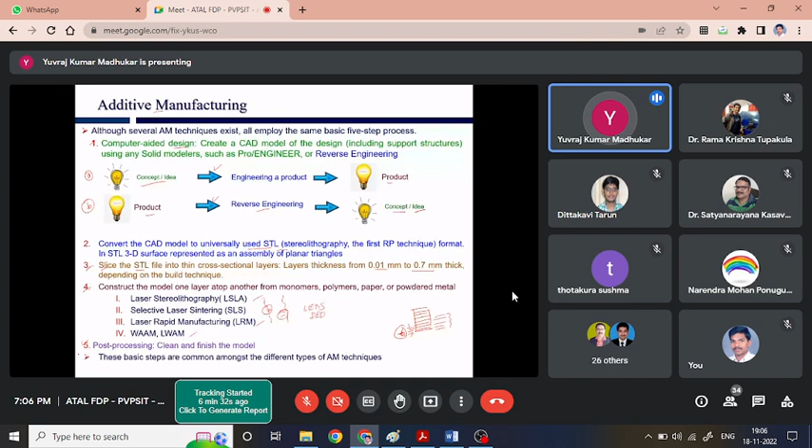In case of additive manufacturing, we cannot get the finishing of the product as what we get in a machining process. So if we want that level of finishing, yes, we have to go for post-processing. There is no alternative.

Now, stereolithography or the STL file format represents any CAD model as a triangular tessellation. While converting it, we have to make sure we are representing the actual CAD model, and the number of triangles or tessellations we use should not be very much high or very much low.

If it is too high, we are unnecessarily increasing the computational time and complexity. If we make it too low, it may not be able to approximate the exact size of the part or product we want to make.

For example, when we wanted to make this kind of nozzle, we went for a coarse structure as well as a fine structure. When we manufactured the product using both STL files with the FDM, fused deposition modeling process, in terms of accuracy we found there was no difference at all.

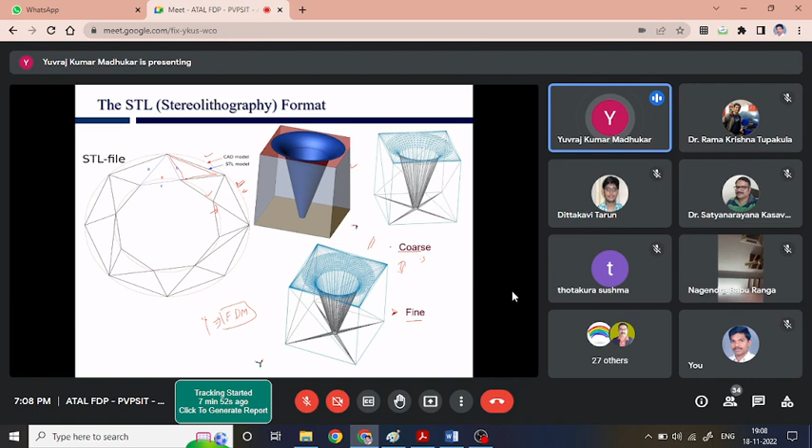So while converting the CAD model into the STL file format, we have to ensure we are choosing the number of tessellations or triangles as appropriate as possible, which can give a better representation of the part to be manufactured, and we also have to consider which process we are dealing with.

Now, supports are also an essential part of the additive manufacturing process. Whenever we get any overhang features that need to be deposited, since it is a layer by layer manufacturing process, certain supports have to be provided, and there are different mechanisms for this.

We have to design these supports while making the CAD model itself. Now, when we are going for slicing, the one thing we need to take into consideration is that slicing is nothing but dividing the CAD model into a number of layers.

When defining our layer thickness, the higher the thickness, the lesser the build time. However, it leads to the formation of cusps at the edges. We wanted to make a very much oval shape like this, but we end up with cusps here, so it doesn't represent the actual shape of the part.

If we reduce the layer thickness, yes, we increase the dimensional accuracy of the product. However, it takes longer time to deposit because the number of layers has increased. So somewhere in between, we have to find an approximation where the layer thickness best represents the part accuracy.

At the same time, the cusp size error should be as minimum as possible. Apart from that, while slicing, we should choose the part orientation so that, as much as possible, these errors can be avoided. For example, if we want to make a rhombus kind of shape, instead of depositing it in this direction, we can turn it to 45 degrees and deposit a simple rectangle or square kind of box layer by layer.

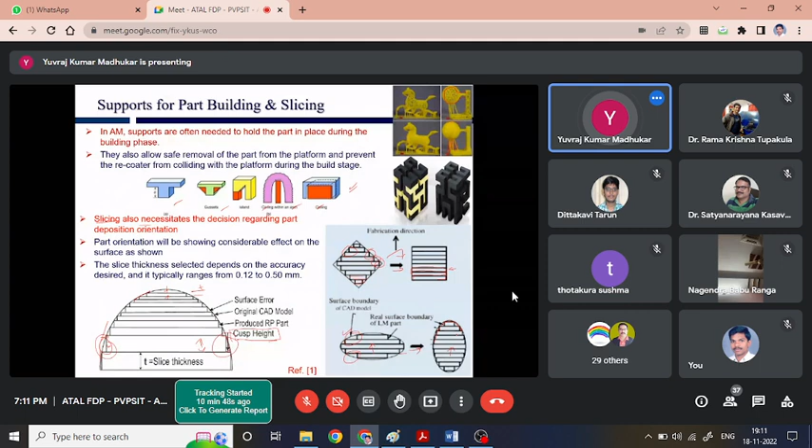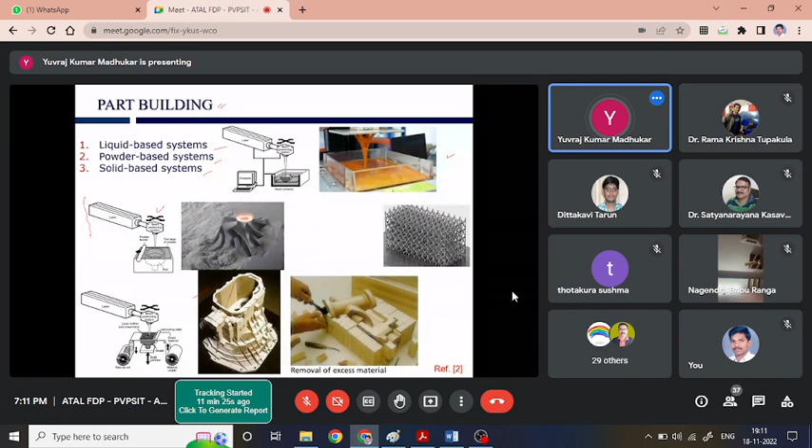Now about part building, there are different methods for making the part. It could be a liquid-based system like stereolithography, which is specifically for polymer-based additive manufacturing. For metal additive manufacturing, we have powder bed fusion processes like selective laser sintering and selective laser melting, and there are also processes where papers or thin sheet metals can be processed, like laminated object manufacturing, and many other additive manufacturing methods. I think all of these must have already been covered in detail, so I'm skipping this part.

Now moving to today's topic, we will discuss additive manufacturing in complete detail, specifically its monitoring and control for Industry 4.0 application. When we talk about WAAM, it is a wire arc based additive manufacturing process. Now, in order to go for applications like Industry 4.0 and smart manufacturing, all these manufacturing processes basically involve computer integration as well as some sensors and actuators, so that the stage or state the manufacturing process has already reached is known to the operator or the person monitoring it.

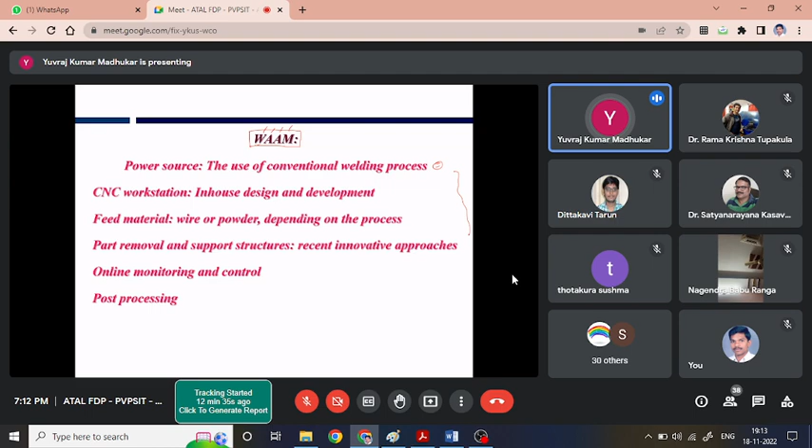So in order to ensure all this, we need to know the construction of the entire wire arc additive manufacturing process. For example, the first one is the power source. What kind of power source can we use for the additive manufacturing process? That power source has to be computer integrated, only then monitoring and control is possible. So while choosing the power source, we have to ensure it comes with that facility from the manufacturer itself, or we have to make our own electronic system so that we can communicate with the power source.

So we can use any conventional welding system for the WAAM application; there is no difficulty in that. However, when we talk about additive manufacturing as a computer integrated manufacturing system, not every welding process or arc welding power source can be used. We have to use certain power sources only, which can be made compatible with the computer, or somehow we can communicate with the machine. That information we have to ensure while buying the power source. However, a conventional welding machine can be used for the WAAM application, no problem at all.

Now, since we're talking about additive manufacturing as a computer integrated manufacturing process, yes, of course we require the CNC workstation. Now, if we go to the market to buy the CNC workstation, the cost is of course going to be very high.

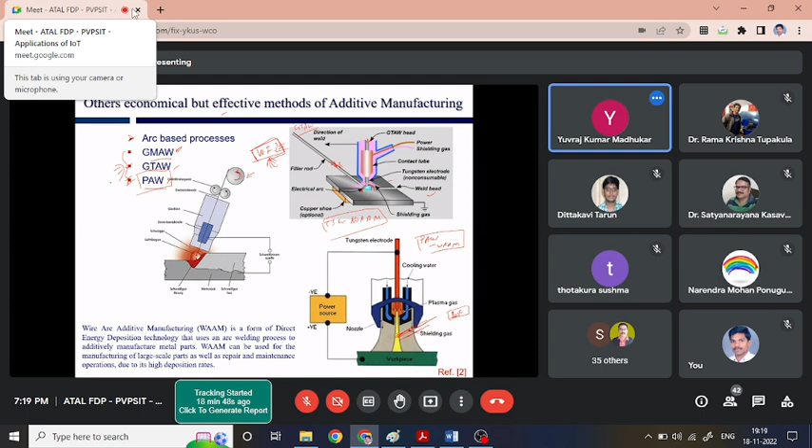However, depending on the application of the product, we can selectively machine it and reduce the overall manufacturing cost.

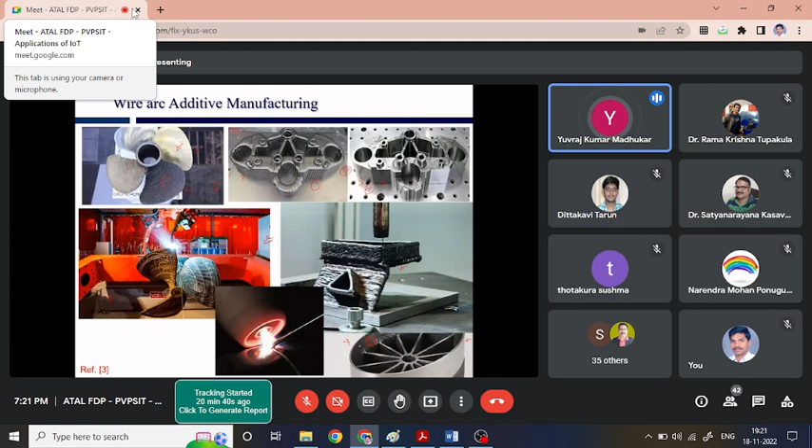So whenever we are going for post-processing, specifically machining, sometimes we have to be very selective depending on our application. We should choose which part or side of the component has to be machined, so that unnecessary machining can be avoided.

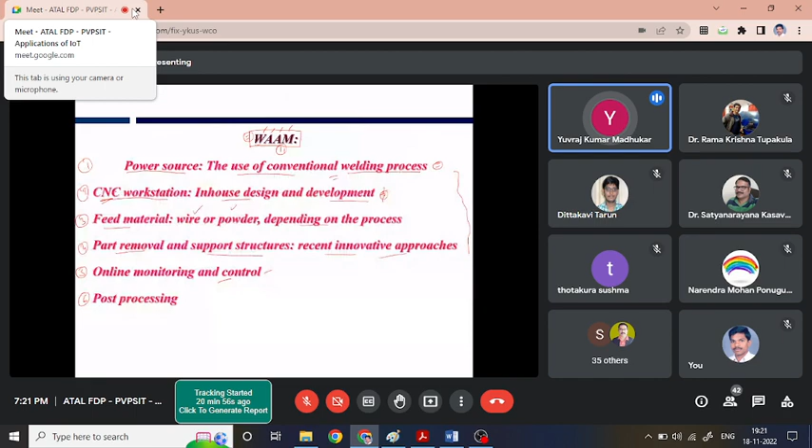Moving further, let us build our own WAAM system. Can we make our own CNC workstation? Making a CNC workstation is not a very complex job, it's quite simple. Here, basically what we do is we have a lead screw, which is nothing but a screw with spiral threads on it, and two support shafts which are simple straight shafts.

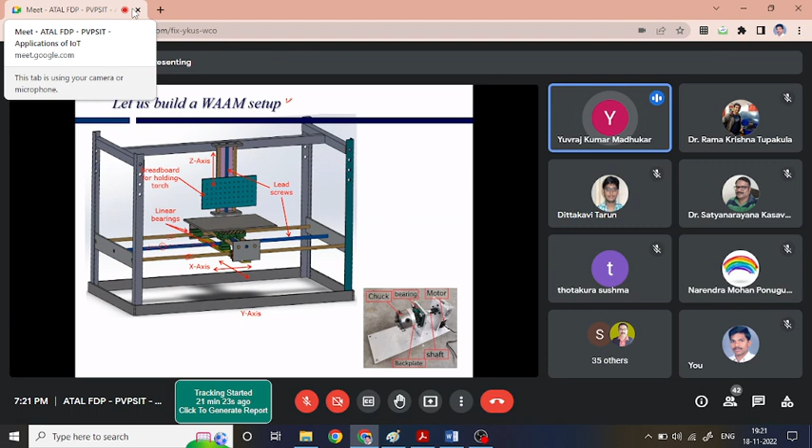There's no thread, nothing on these support shafts. It is mounted on a plate with the help of a linear bearing. Now, a linear bearing is basically a bearing. When we say bearing, it's nothing but one shaft stationary and another shaft rotating. A linear bearing is the same thing, however it moves in a linear direction.

So it's nothing but a structure like this, on which a number of metal balls are there, which can move to give the reciprocating motion. So what we can see over here is the linear bearing, supported on the same shaft. Now this lead screw is at the center over here.

We have got the ball nut. The purpose of the ball nut is similar to any nut. It basically can move if we have a thread. If you rotate the nut, it can move from one place to another in a linear direction. Or if we rotate the shaft, the nut will automatically move in a linear direction.

So here we have the ball nut at the center, and at one end we can connect it with some sort of power transmission device. We can go for a stepper motor, the best option. When the stepper motor rotates this shaft, it moves this ball nut, converting the rotational motion of the shaft into linear motion. Depending on the motion of this motor, either clockwise or anti-clockwise, we get the reciprocating motion of this entire stage.

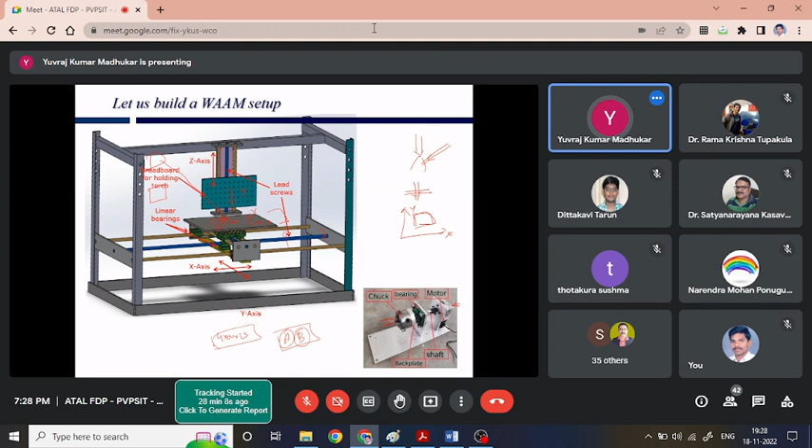We can make it either a 4-axis workstation also. So this is the system we have built ourselves. The cost of our entire system came close to 1 lakh rupees only. Here we have the stepper motor, and here is the shaft.

Here is the lead screw, two lead screws for providing the support, and the space of this workstation, what we have developed in our laboratory. It can use in x-axis for nearly 1 meter, and the y-axis it gives 0.5 meter, and in the z-axis it can use up to close to 0.4 meter of workspace. It would be able to provide no problem at all.

Here we have seen the GMAW torch hanged on this breadboard, and here we could see one terminal of the power source of the MIG power source connected to the workstation.

And here we have got our stepper motor. Now if we see the control system, since we are dealing with the additive manufacturing process, which is the computer integrated additive process, we need to communicate to the machine, we need to communicate to all these motors, and it should respond with respect to the command we are going to write. So ultimately we need a PC interface, personal computer interface. For that, typically we require the CNC control boards or the PLC.

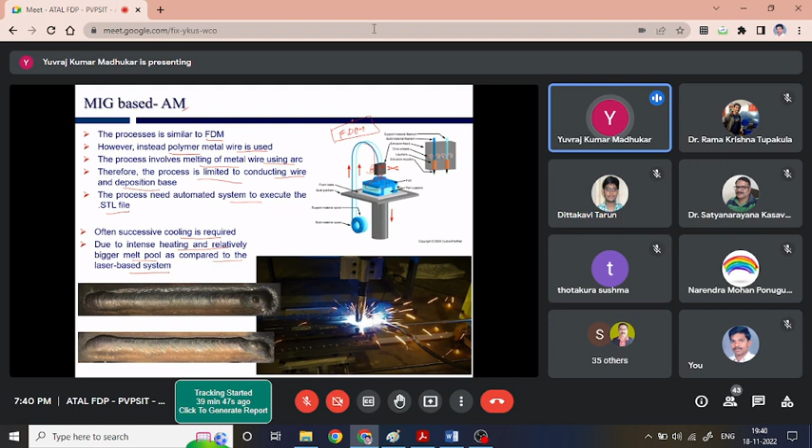One of them includes connecting a relay to our PLC control system and triggering it as soon as the stepper motors start moving, or the G code starts. We need to ensure that movement of the CNC workstation and the ignition of the arc take place at the same point of time.

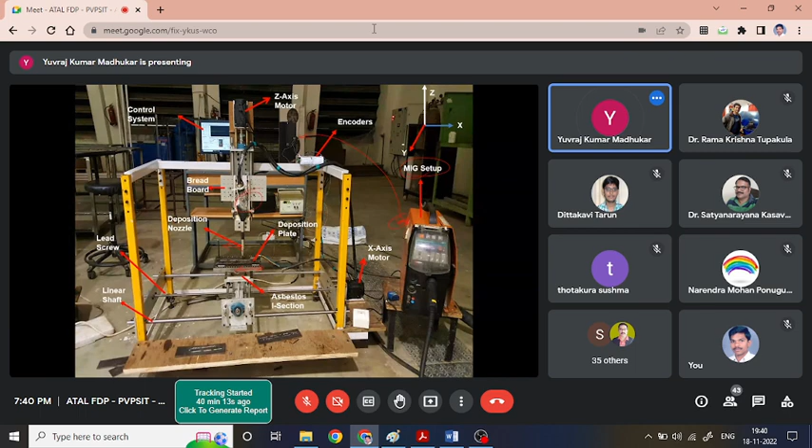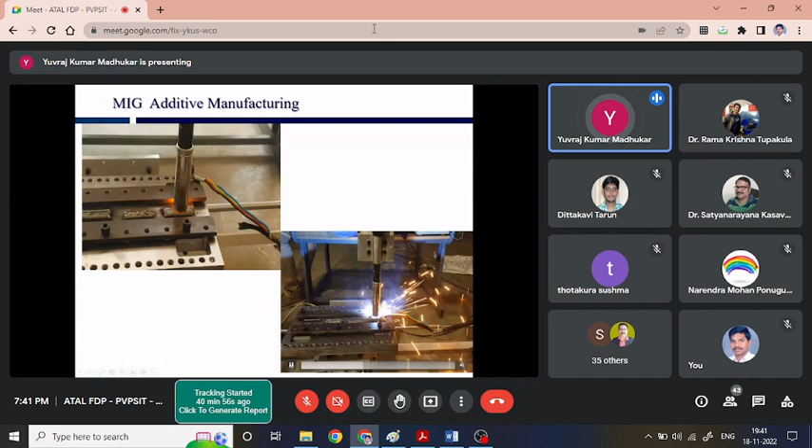In this particular first video we could see that sometimes the arc is getting off during the process itself. Here the arc does not remain consistent - it keeps turning off during the process, compared to the other process which is becoming almost continuous.

All of this affects the part quality we are depositing. At the beginning, we are going to end up with a structure depositing like this - a lot of undercuts on the deposition. Even after machining, there are some blowholes. It does not give very good dimensional accuracy. At the beginning, we will come across this kind of situation only.

However, we have to understand the basics of wire arc based additive manufacturing process. If we talk specifically about the MIG-based additive manufacturing process, MIG is nothing but a constant voltage process, and the current will be determined based on the resistance between the electrode and the workpiece.

Look at one case when the wire feed speed is, let us suppose, 3 meters per minute, and the commanded voltage is, let us suppose, 17 volts. We get a deposited bead something like this - more here, lesser here, more again, lesser again - meaning we are not getting a consistent, good deposited bead.

So what we did was record the welding parameters in situ - welding voltage and current. Since MIG is a constant voltage process, once the arc has been stabilized, the voltage becomes almost stationary, close to what's been commanded, but it goes relatively higher, to 19.2 volts.

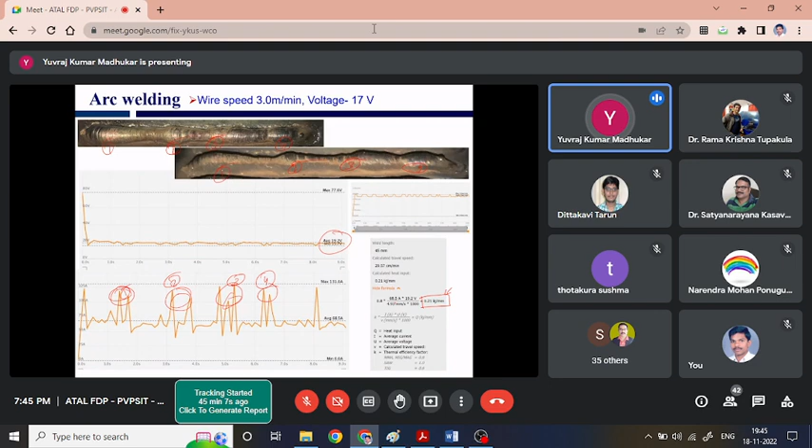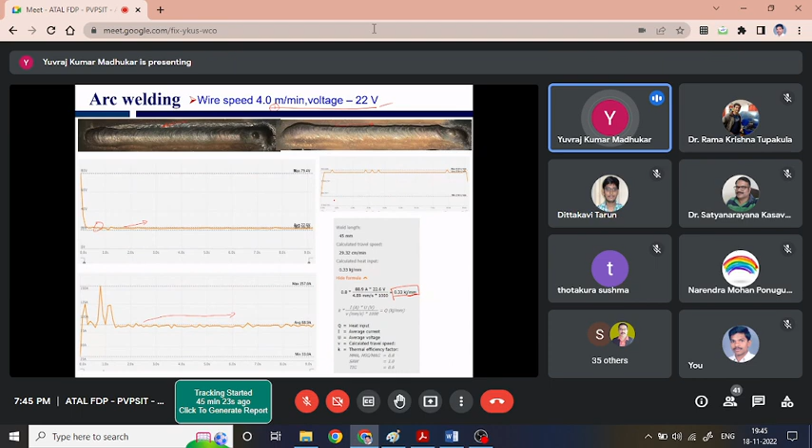Now, if we calculate the amount of energy input, in this case we've been giving nearly 0.33 kilojoule per mm, and in the previous case it was nearly close to 0.21 kilojoule per mm. So certainly, without changing the material property, we are giving much less energy. There is a high chance of short circuiting, and because of that the current increases wherever the short circuiting happens, causing non-uniformity in deposition. Probably in all these cases this kind of situation has been happening. So the bottom line is we need to optimize the parameters for the additive manufacturing application.

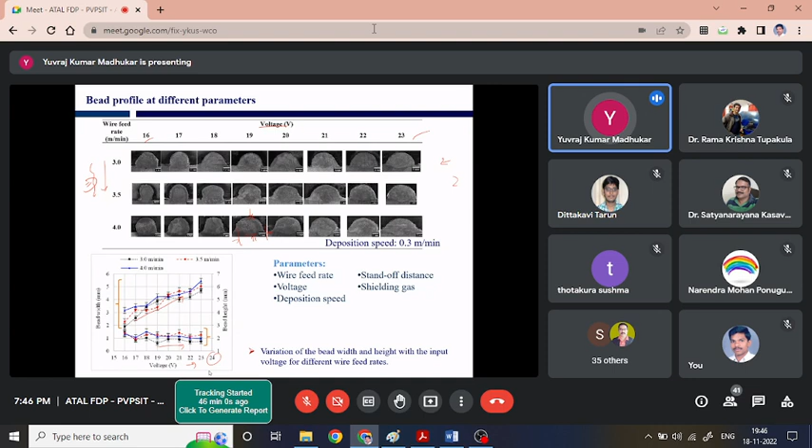Here we could see, for different voltages starting from 16 volt to 23 volt and different wire feed rates, different bead properties can be found. The bead width increases almost linearly with respect to the voltage, however the bead height remains almost constant. It is quite obvious, since we are increasing the voltage, we are increasing the input energy. So it is obvious, but we have to optimize it.

Once we could optimize the parameters, we could deposit such beautiful shapes, no problem at all. Even in case of WAAM application, we could deposit wall thickness of the order of just 2 mm. Some fulcrum shapes, resembling propeller shapes, we can deposit very easily.

Moving to another type of additive manufacturing process, TIG-based and plasma-based additive manufacturing process. Here, first the electric arc is stabilized between the electrode and the base plate. Further, the wire is fed into the arc through an additional wire feeder. The deposited layer, bead profile, and bead height depend on the arc, electrode diameter, point angle, stand-off distance, mode of operation, whether AC or DC, arc current - all these parameters play a certain role.

So here we have our TIG power source, and here we have the wire feeder. Now, if we go to the market, there are different kinds of wire feeders available. Some of them are typically called cold wire feeders. There are some hot wire feeders also available. So we can buy any wire feeder, no problem at all.

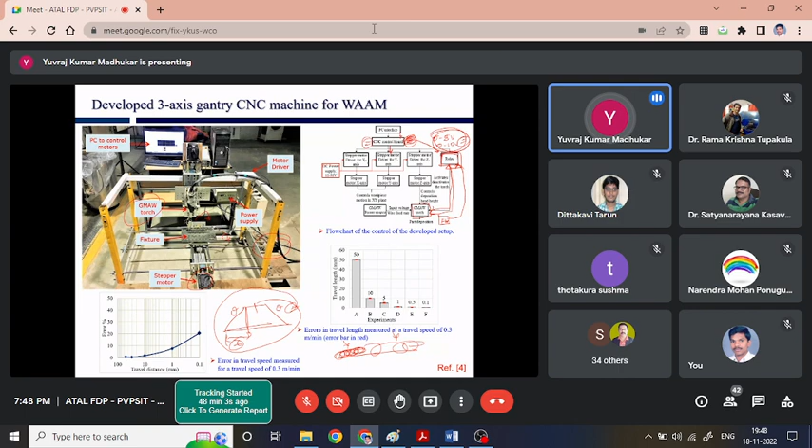However, one thing we have to ensure when buying the wire feeder is that it should be triggered or communicated to through some additional circuitry or relay, so that we can connect this wire feeder similar to how we connected the power source, like the GMAW power source. Similarly, the wire feeder can also be connected to the relay, and as soon as the arc is established and stable, the wire feeder should start feeding the wire. So we have to ensure that particular provision is always there in case of a wire feeder.

Now, if you go to the market, there are different types of wire feeders available. If it feeds the wire at room temperature, we typically call it a cold wire feeder. If there is provision for heating the wire, because preheating sometimes gives certain advantages on deposition, we call it a hot wire feeder. There are some wire feeders which can feed the wire in pulse mode, meaning feeding, then stopping, feeding, then stopping. So different options are available. Of course, with more functions, the cost of the wire feeder increases significantly.

However, one feature we have to ensure it has, whenever going for the TIG-based additive manufacturing process or the WAAM-TIG process, is that this wire feeder should have one more function apart from external triggering - a retracting feature, the push-pull mechanism.

What is the push-pull mechanism? If I zoom into this area, in case of a wire-based additive manufacturing process, we generate the stabilized arc into the base plate and we feed the wire into this stabilized arc.

Now at the edge, once the deposition is done, we have to make sure the wire is pulled back from this arc zone before the arc is turned off. Otherwise the wire is going to get stuck to the deposited bead itself. If that happens, every time we have to manually cut this wire.

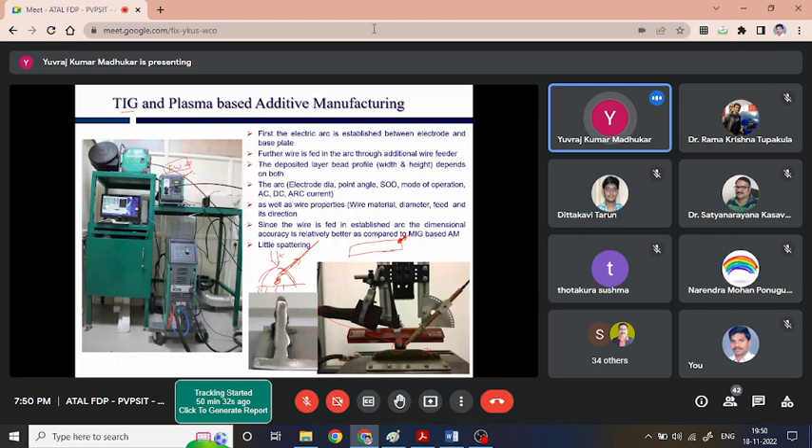Here we could see how gentle this process is compared to MIG. There is no spatter at all, and it's a very gentle process. In a normal VGA based camera, there is a lot of glowing, so we couldn't see how the deposition is going.

However, when we recorded it using the thermal camera, here we could see first the arc has been stabilized. Then we have to feed the wire into the stabilized arc tip, and a very nice bead we are getting just behind it. There is no spatter at all.

Now this is the first layer of the deposition, and this is the 10th layer of deposition. Here we have to notice, when depositing the first layer, the melt pool size is very much small, compared to when depositing the 10th layer, where the melt pool size is significantly larger.

To realize the size of this melt pool or melt puddle, this electrode diameter is 2.5 mm. Considering that, we could say the melt pool size is of the order of nearly 12 to 15 mm. In these two cases there was no change in deposition parameters, meaning with an increase in number of layers, the melt pool size increases significantly.

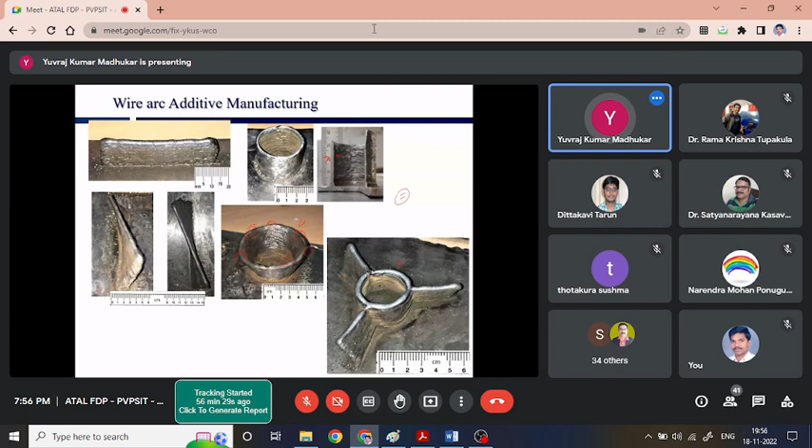However, at the same time, in case of arc-based additive manufacturing processes, whether MIG, TIG, or plasma, the dimensions we get on the deposition surface always form certain striations, and because of that the standoff distance between the electrode and the workpiece keeps fluctuating, compared to the first layer of deposition where we deposit on a flat bed. So in the WAAM process, once the bead is deposited, the surface has certain striations, and that striation creates a greater challenge for the stabilization of the arc.

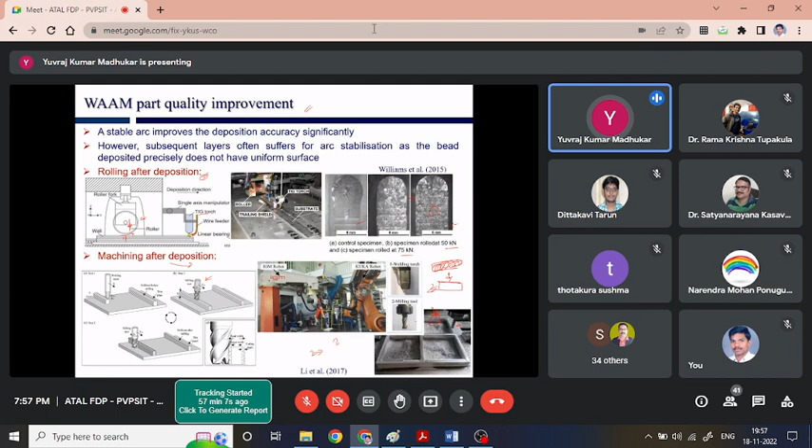So if we go for machining, the situation becomes such that every layer is deposited on a flat plate. For applications like monitoring control, this kind of surface gives much better results and much more control over controlling the entire process. It also helps with the machining of intricate shapes, because if the shape is very complex, sometimes after the complete deposition of the product, tool reachability becomes a matter of concern in WAAM.

Now we may need to come across some innovative ideas for WAAM in order to minimize the requirement of a support structure, because in case of WAAM, the support structure is the biggest enemy. We saw the melt pool size is relatively much bigger when we go further into the deposition.

So one idea we come across: for example, if you're dealing with a part like a propeller blade, if you go for bottom to top deposition, a good amount of support structure would be required, and in WAAM, making the support is a huge challenge. So we can modify or come up with innovative ideas to minimize this requirement of support structure. One such idea could be going for radial slicing.

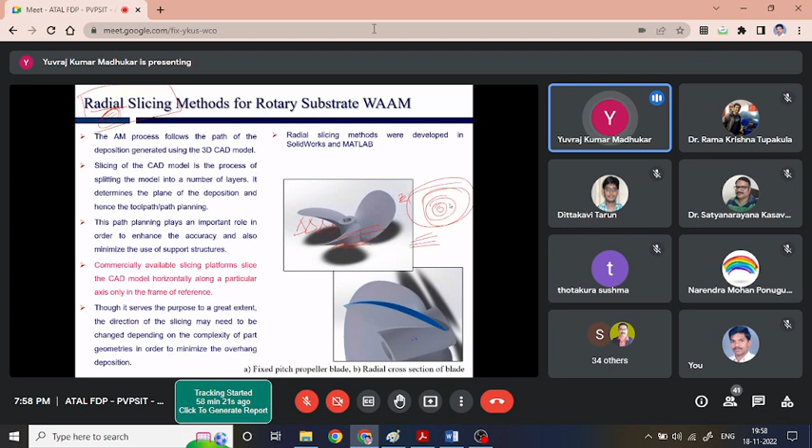So instead of slicing from bottom to top, we can slice the product radially. Of course, no commercially available slicer or software can do this. We have to write our own code using MATLAB. There is no alternative, or there are some manual methods also available. For example, we can do it in SolidWorks as well.

What we have to do is radially slice the part geometry, and with respect to different coordinate systems - the xy plane, xz plane - make a number of lines equal to the layer thickness, and try to find the coordinates of each point in both the xy and xz planes, and find the coordinate of any point in x, y, z coordinates. Collect that data into an Excel file or IGES file format, and then write your own code.

Yes, it can do the job, however it is very laborious. The better way is to write the code in MATLAB file format, on the MATLAB platform. We wrote our code there itself, and let us suppose this is the blade.

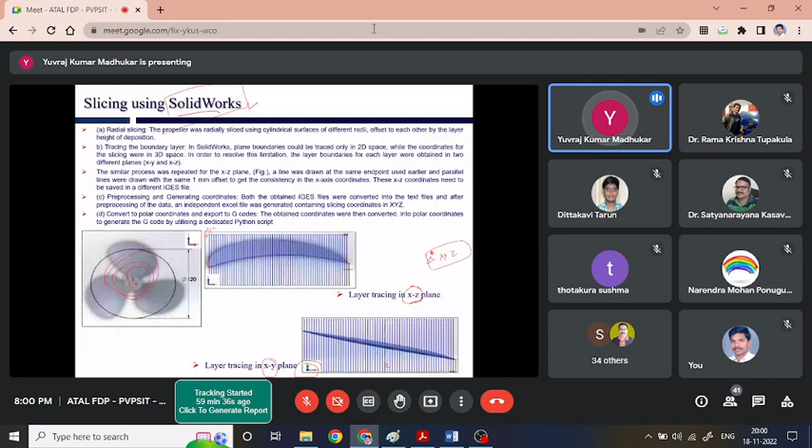A different radius of a circle can be used, equal to the layer thickness, to find out the coordinates of each individual point on this circle or layer, in both the xz plane and the xy plane. Once we know the coordinates, we can write code in MATLAB itself to generate the G code. That G code we can feed into our PLC workstation.

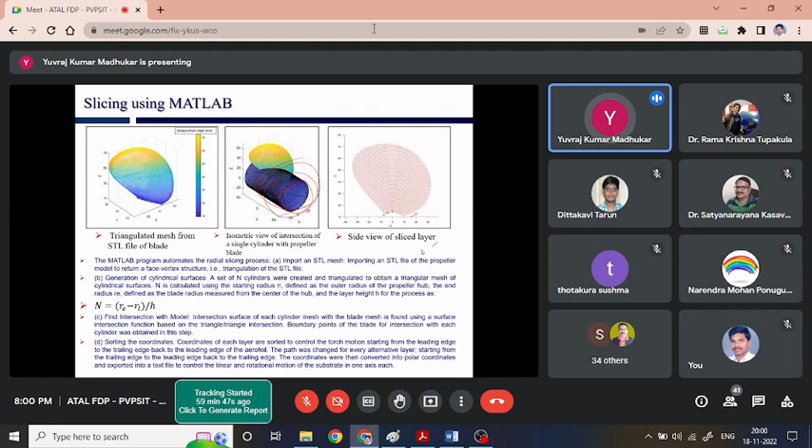By doing this, we could deposit, say, on a shaft acting as a base, a propeller blade without the use of a support structure. Since we are dealing with a shaft as the base plate, we are not depositing on a flat plate one layer upon another. We have to go for a workstation which can move the job horizontally about the rotation axis.

So for that, we can go for a fourth axis on the workstation. We can build it simply: here we require a chuck, and the chuck shaft is supported by some supporters, and the motion we can provide using a stepper motor, which again can be connected to our PLC workstation, and we can get the code using our MATLAB programs.

So the bottom line is we may need to come up with innovative ideas to minimize the use of support structures in the case of WAAM, otherwise, because making supports is very difficult in this case. However, there are a lot of innovative ideas coming into the literature.

If you look into the literature from nearly the 1990s to 2020s for additive manufacturing and 3D printing, the number of applications we see close to, in 2017, has gone close to nearly 6,500 publications per year. However, in case of support structures, we hardly get 500 publications throughout the year. So there is a lot of scope for research in the field of making support structures, specifically since making support structures for this process is very difficult.

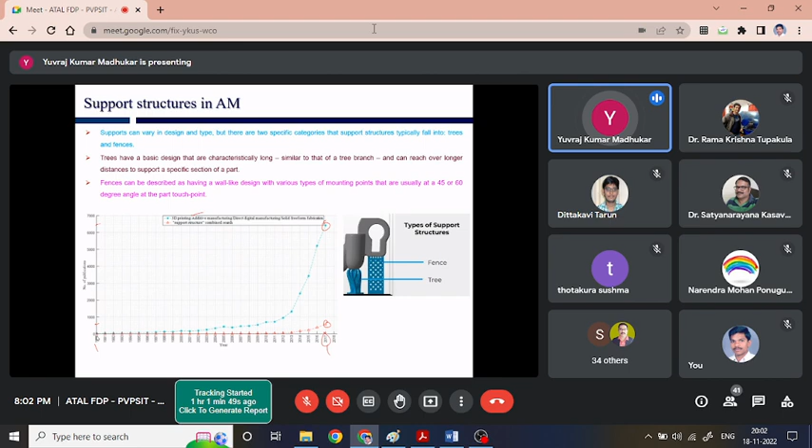So in order to overcome this problem, one such idea could be radial slicing. Another idea for making the support structure, if we see, is that the requirement of a support structure comes only to provide the base for the first layer, and the further layers would be deposited on it.

If we talk about processes like selective laser sintering, laser engineered net shaping, and direct metal laser sintering, support structures are often required depending on the part geometry. The typical structures are lattice support, honeycomb support, unit cell, etc.

Achieving this kind of support structure in the case of WAAM is relatively very difficult. So either we can go for a multi-axis workstation and innovative slicing methods like we did, or we have to come up with certain more innovative ideas.

So what we have done here: we took metallic pillars, or cuboids, of certain dimensions, and arranged them into an array of rows and columns. All these pillars have certain holes, one on this side and another on that side, and we mechanically fasten them using a nut and bolt. At the top surface, here we have a surface we can use for deposition.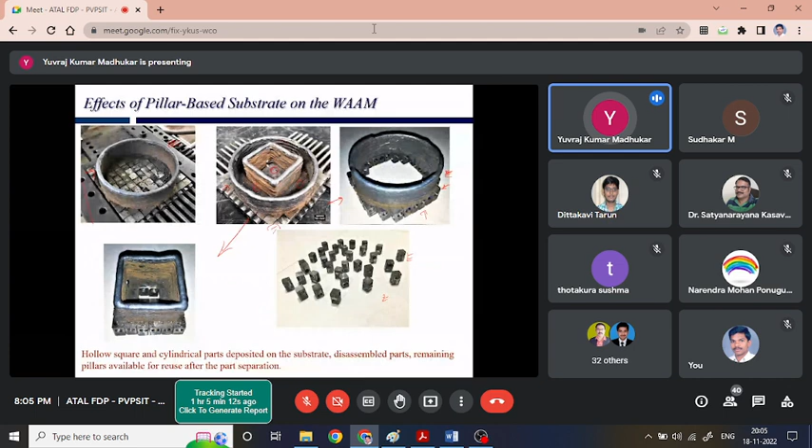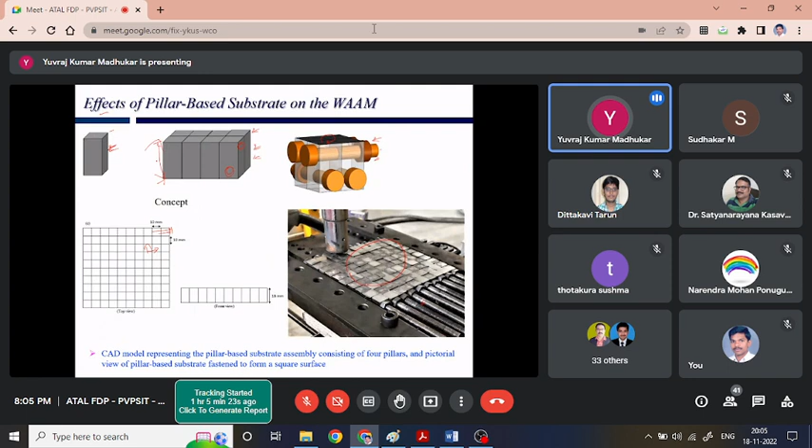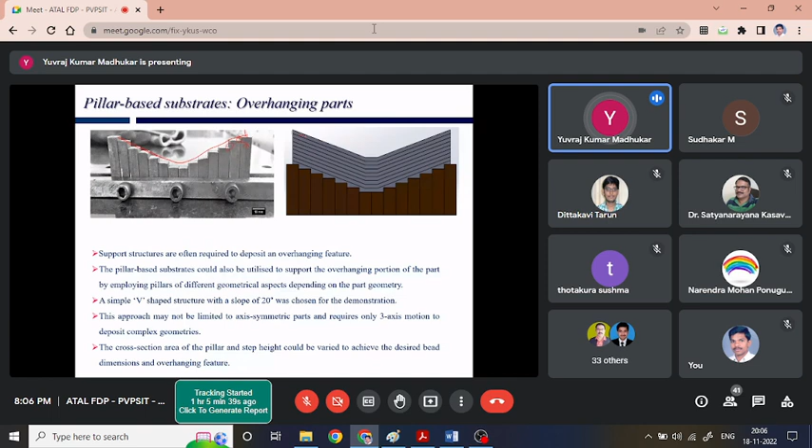Now, what if we could achieve this kind of deposition if the concept works here? We can think of changing the pillar height. Instead of taking pillars of constant height, we can vary the height in a certain pattern. For example, here we change the pillar height in a V pattern. Just the step size has to be optimized, so that deposition takes place properly and we are able to deposit this kind of overhang feature, for a WAAM application as well.

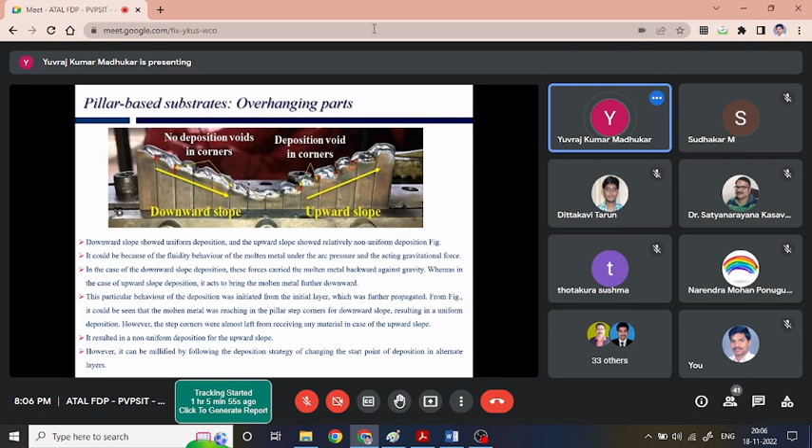So here we could see at the beginning there might be some issues with the deposition. However, as the parameters are optimized and the number of layers increases, we are able to achieve the best deposition, like this, no problem at all. So certainly we are able to deposit it.

That means by changing the pillar heights, we are able to deposit overhang features without using any additional axis of motion, unlike what we did in case of making a propeller. By changing the pillar height, we can deposit overhang features. Yes, of course, we still have to machine it for separation.

But the challenges we had in case of the base plate, after making some sort of pillar and then depositing the overhang feature, can now be removed completely. So by this method, we are able to minimize and make the support structure simpler in case of the WAAM as well.

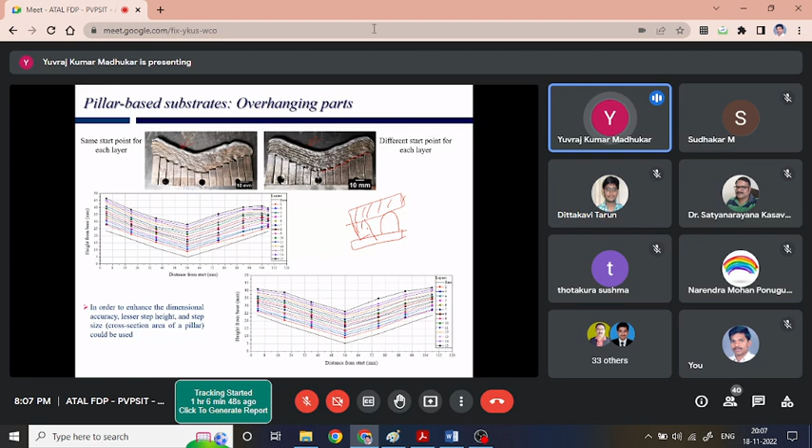If we reach this stage, another innovative idea we come across is specifically regarding the result of conventional machining, which is nothing but wastage of metallic chips.

So what we did, we collected metallic chips from our central workshop, and then we compressed them using some sort of die punch mechanism, ensuring a thickness of the order of nearly 5 to 7 mm, 3 to 5 mm, and 7 mm at this end, ensuring the density of the plate, or this porous structure, is of the order of nearly 40 to 50% of the solid metal plate.

Now, what we did basically was collect the metal chips and compress them, in order to make a plate which has a porous structure. Since these metallic chips have a lot of edges, while compressing they interlock with each other, so it won't disassemble so easily.

Since it is metallic chips, we can use it for additive manufacturing applications. So, making the arc stabilized between this metallic chip base and depositing on it is certainly going to be very, very challenging. However, it is feasible. We were able to achieve it.

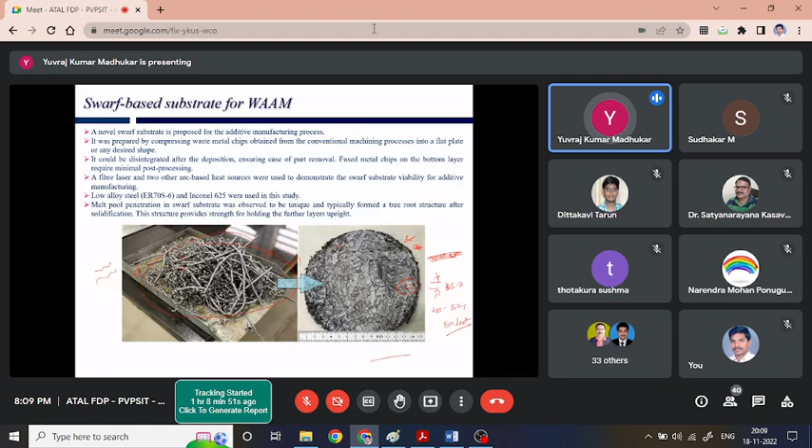Here, actually, since we have this swarf substrate, if we look inside it, it is nothing but a porous structure which has a lot of holes in it. So once we are depositing the first layer, in case of wire arc additive manufacturing, ultimately at the end of the day we are melting the wire and depositing it onto the base.

Now, in case of a swarf substrate, as soon as we try to deposit on it, what happens is that molten metal starts flowing in all directions through the porous structure, and we get a structure similar to the roots of a tree. So this shining portion we can see is nothing but molten metal which has flown in all directions. Looking from the top, this is the molten metal drop which has formed.

So it has started moving in all directions, making a structure similar to the roots of a tree, which gives enough strength for the further layers to build up. Here we could deposit nearly 30-40 layers, no problem at all. The dimensional accuracy was very good. And after the deposition, with simple hammering, we could take out the part very easily, no problem at all.

Yes, some amount of our chips or swarf remains get fused with the cross section of the part where the deposition is taking place. However, with minimal machining, we could achieve a very finished surface.

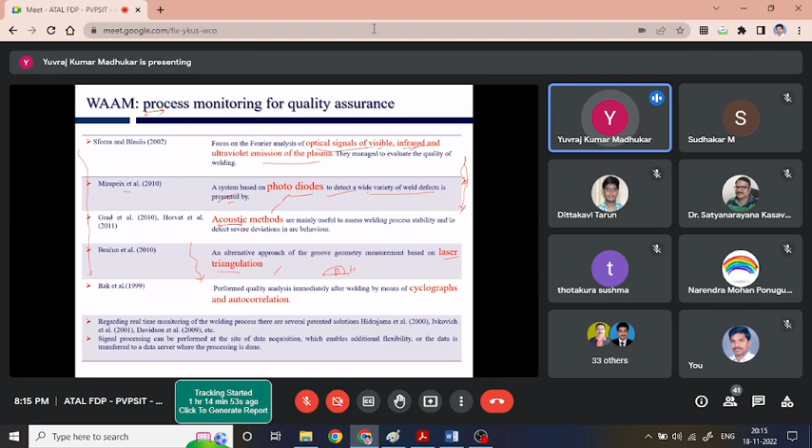Now, all these sensors may work in a laboratory environment. However, whenever we talk about the industrial environment, there's a lot of noise, a lot of light coming from here and there, so those sensors may not be useful.

However, in case of WAAM, ultimately what we are doing is melting the wire and allowing it to deposit and solidify on a base or the already deposited bead. So can we take temperature as an input signal? Can temperature be considered a primary parameter to control the rest of the parameters, making some sort of feedback control system which will regulate all the input parameters, because the number of parameters we are dealing with is significantly high?

We are dealing with arc voltage, arc current, standoff distance, gas storage, deposition speed, XYZ motion, power tracking. All these things have to happen at the same point in time, and it should assure the quality of our deposition. So can we take the generated temperature as a primary parameter to control the power ratio or the process completely? It shall regulate the input power to maintain the desired temperature at the desired location, which could correlate with the build quality further on.

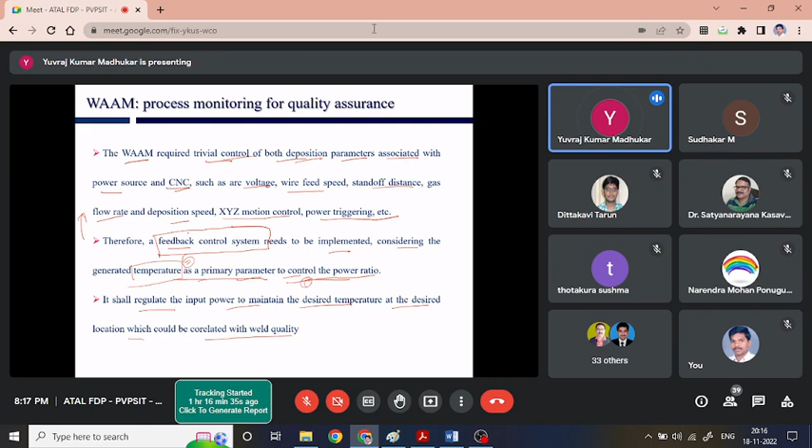Since we are dealing with temperature, our ultimate goal is nothing but to melt the wire and deposit it. Temperature seems to be a good parameter because it is basically the result of our input parameters. So we can take temperature as an input parameter and try to regulate the rest of the parameters, making some sort of feedback control.

When we talk about feedback control, if you look into the literature, there are basically three types of control systems: open loop control system, feed forward control system, and feedback control system. In an open loop control system, let us suppose this is the system, we give some input parameter and we get a certain output.

There might be some disturbance coming into the system which gives us some error, and we do not have any control over it. Based on certain experience, we may be able to control the input parameter.

In order to automate it, the feed forward control system comes into the picture. Whatever error we are getting, based on observations, we try to minimize the error by modifying our input parameter so that the system can run.

And again, whatever output we are getting, we don't have any control over that. We only have control over the input parameter, and based on experience, we are modifying it.

To optimize or minimize the errors we are getting.

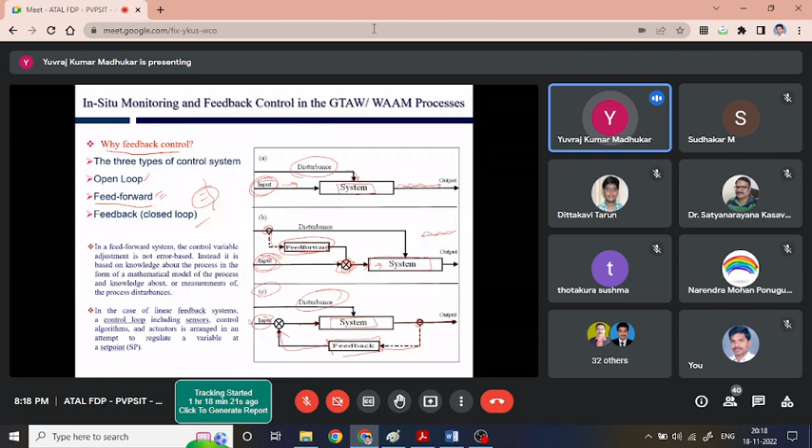The feedback control is probably the best system, because we send the input signal to the system or process, and whatever error comes into the output, based on that output or error, the control system modifies our input parameter in order to minimize this disturbance. So it seems the feedback control system is going to be the best solution among all for our application.

Now, there is another reason for going for the feedback based control system. Even if you are going for it, the question is where to position and where to monitor our temperature.

Let us suppose this is the plate on which the heat source has been moving. We could distinguish different zones like this: at the center we have the melt pool, then a partially melted zone, and behind this heating source, let us suppose the heating source is an area source in the form of a circle, then the melt pool typically forms in this shape.

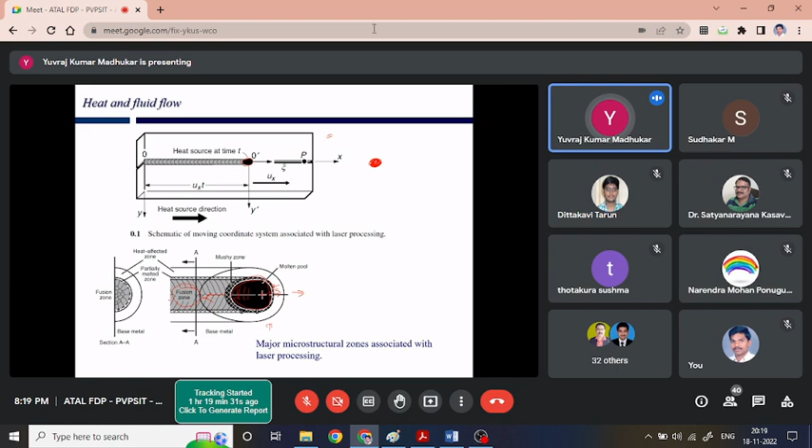In front of the melt pool we have a partially melted zone, and once the heat is moving in this direction, behind this heating zone we have the fusion zone in which solidification is taking place. Now, where to place our temperature monitoring system?

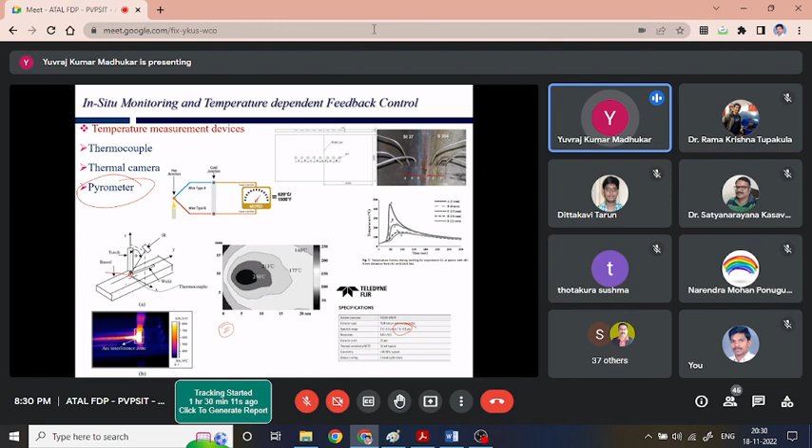So it is going to give us the flexibility or the freedom to tightly focus our pyrometer into the zone of interest where we want to measure the temperature, for making a feedback-based control system, and it is not going to get disturbed by other energy sources, like an electrode and others.

Now here one more thing, in case of a pyrometer, another problem comes into the picture: it is dependent on the emissivity of the surface. Now the emissivity of the material changes with respect to the temperature.

So yes, it has got a lot of advantages. Temperature measurement of a moving or overhead object can be made, no problem at all. Very fast response time, exposure time it can measure without interaction, no influence on the measuring object, non-destructive measurement, long-lasting measurement, no mechanical wear at all.

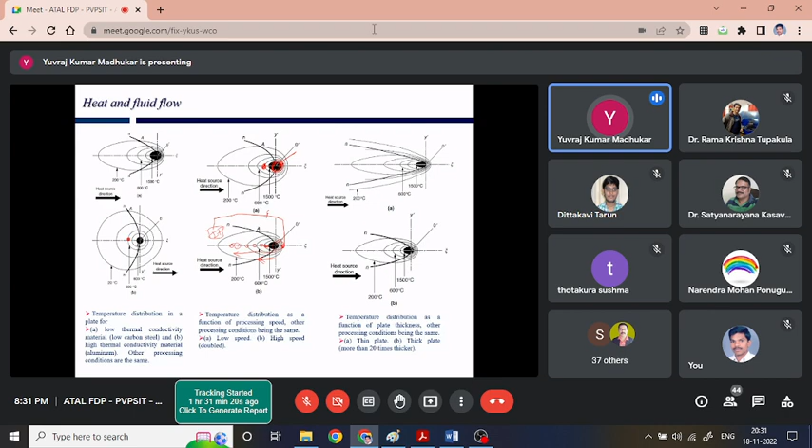However, because of this emissivity, since the emissivity of the material changes with the temperature, and here we are talking about a very dynamic process where we are melting the wire and depositing it, the temperature is certainly going to be very much fluctuating. And since the temperature is fluctuating, the emissivity of the body, being a function of temperature, is going to fluctuate significantly, which is going to possibly give us a lot of errors in temperature measurement.

So this pyrometer provides a non-contact solution, which is also helpful when the target is not stationary but moving. Now, this is possibly the images of the pyrometer we might have been seeing.

In the field of pyrometers, there's a recently new technology that comes into the picture called the ratio pyrometer. There are two independent technologies: single color and ratio pyrometer. In case of single color, it takes the spectrum only from one zone, and in a ratio pyrometer, it takes the spectrum of a defined zone, with two independent monitors and independent temperatures.

So we are getting the object temperature T1 and the same object's temperature T2, and we are dividing T1 by T2, since the emissivity over this small spectral distance is supposed to be almost constant. This emissivity term is going to get cancelled, and we are going to get the almost absolute temperature.

So if you are dealing with a process like WAAM, where the temperature distribution is not going to be very uniform, if the process is very dynamic, the situation, even using a normal pyrometer, may give us a lot of errors. So moving to a technology like the ratio pyrometer is possibly the best option to go for.

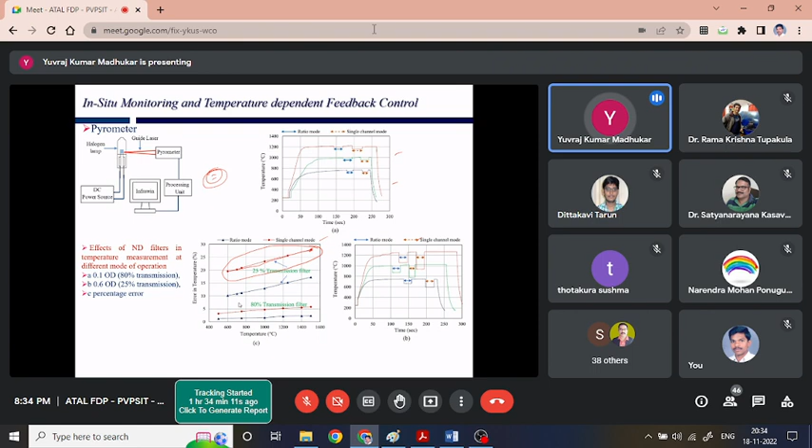So yes, the ratio pyrometer is costly. However, it gives lesser error. So it is best suited for additive manufacturing and the monitoring and control system.

Now at this point of time, possibly we know how to design our WAAM setup. We know what power sources we can use. We know how to move the XYZ coordinate system, how to communicate with the machine. We know which sensor we should use for monitoring and control, which is nothing but temperature, and which specific sensor we should go for. So now it's time to go for depositing the material and trying to control the system.

So this is some initial experiment we have conducted. Here we could see, it is basically a WAAM process. The first layer of deposition uses 150mm, the second layer 130mm, and from the third layer onwards we stick to 110mm.

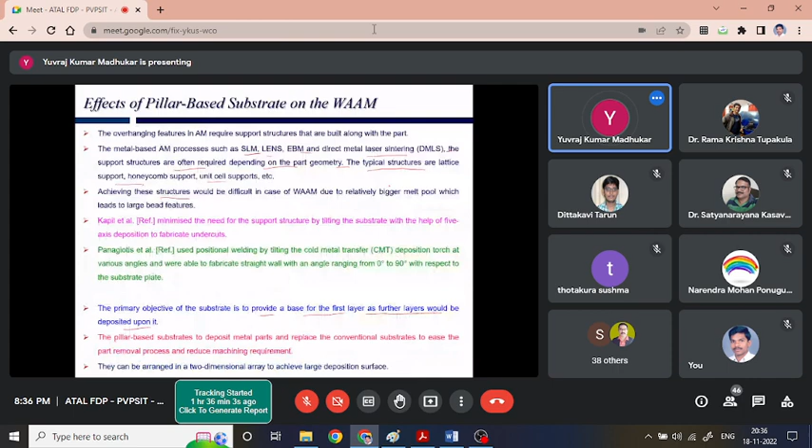This figure, now we come back to our basic figure. When we are depositing the first layer, we are depositing on a substrate. Usually in case of WAAM, we use a thicker substrate, of the order of nearly 5 to 10 mm in width and length of the order of nearly 150 to 200 mm. Basically we take the thicker plate which is at room temperature.

So in order to make the metallurgical bonding between the first layer of deposition and the substrate, we work with a relatively high current. Since the body is at room temperature, the heat transfers very fast onto the substrate, and the dominant mechanism of heat transfer here becomes conduction, because the base substrate is already at room temperature, so it acts like a heat sink. Another source of energy loss or heat dissipation is basically convection and radiation, which is lesser in case of the first or initial layer of deposition.

As soon as we start depositing more layers, we are adding mass to the system. However, the volume through which the heat has to dissipate to reach the heat sink is increasing, and the distance is increasing. That means the dominant mechanism of heat transfer is now shifting from conduction to convection and radiation, which is relatively slower.

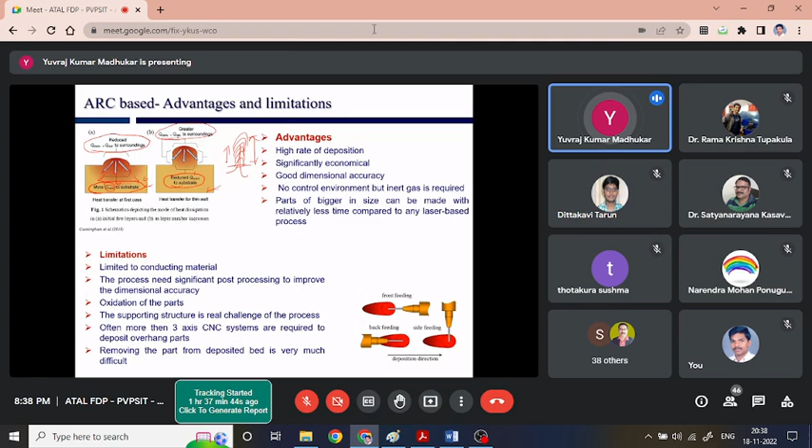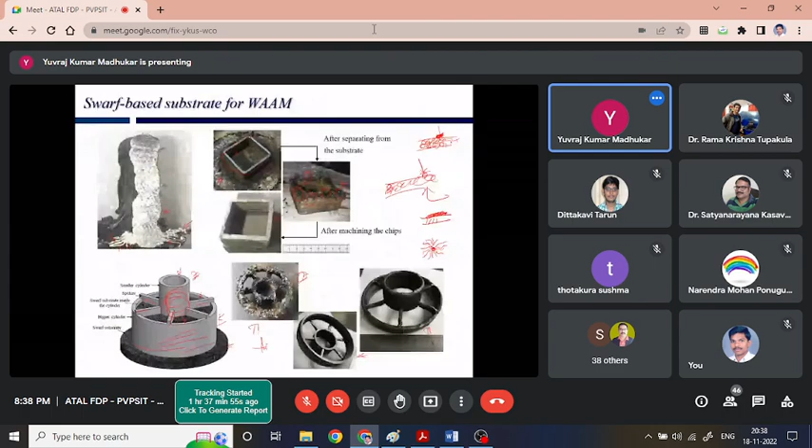That's why, when we deposit the first layer versus when we go for the 10th layer of deposition, without changing the parameters, we could see for the first layer the melt pool size is limited, very small, of the order of hardly 5 to 6 mm. But in this case it is of the order of nearly 15 mm. This is the 10th layer of deposition.

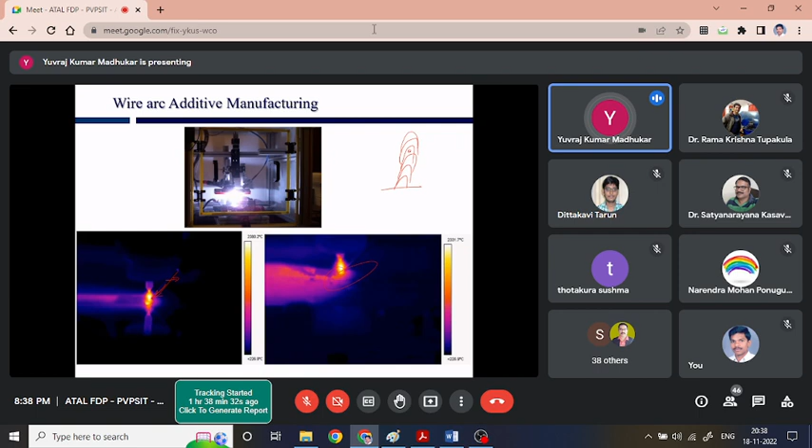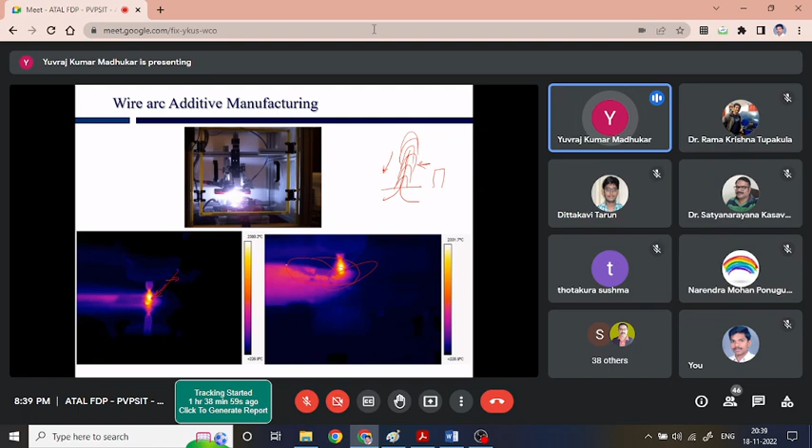It is because over the number of layers of deposition, we are adding mass to the system. That is true. However, the volume through which heat has to pass is becoming much lesser, and this body is already at an elevated temperature. So despite giving some time interval between successive layers of deposition, it takes longer to cool down, which is further reflected in a bigger melt pool size. That means with a lesser amount of energy, a bigger melt pool or the same amount of deposition can take place, which is possibly what was happening here.

Once the number of layers increases from the 5th layer to the 15th layer, despite keeping the input energy constant, the peak temperature is increasing. However, it has been observed that when we deposit further layers beyond the 15th number, it becomes almost constant. It is not increasing beyond that because our input energy has a certain limitation as well. So we can certainly consider temperature as a parameter which can be controlled to regulate the input energy to a desired set point temperature, depending on the material we are dealing with.

So this is basically the idea. We can have a substrate. This is a TIG-based torch, TIG power source. We certainly need a wire feeder in case of a TIG-based WAAM. We can go for the pyrometer.

At this point of time, we know why we are choosing the pyrometer, and why we are keeping it behind the deposited bead. Then we have a certain processing unit and a computer, and the TIG power source is communicated to our control unit. This control unit also communicates with the XYZ motion control system. This is the system we have developed in our laboratory.

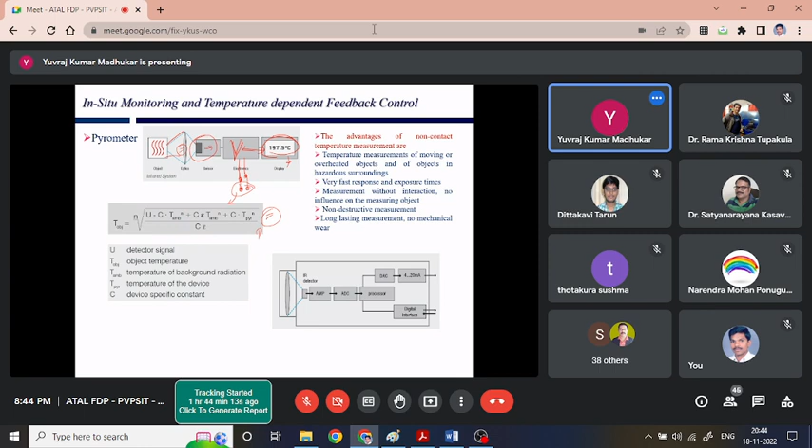So if in the pyrometer we have got the provision to take out this raw data, the voltage generated after the sensor, then possibly we can use this, or write our own code to solve this equation ourselves and get the temperature reading in any platform. So if we are able to get the raw data in the form of a voltage, then calculating the temperature, we can use this particular equation.

So there are certain manufacturers which give the raw data in the form of a voltage and current. We can take this reading directly and put it into some platform.

Now, since we are dealing with so many machines for monitoring and control, like in the CNC workstation, we have got our power source, we have got the wire feeder, we have got the temperature sensor, and all those things. The best option I can think of is basically LabVIEW.

So here we have got the temperature reading, and some communication protocols we have to make in order to communicate with this. Some further control system we have to make in order to trigger our gas on/off, because in case of arc deposition we require the gas, and we require a certain sort of switch in order to stop the process completely.

So we need to get a pyrometer which gives us the raw data of voltage or current, so that we can make the platform or write our own code in some platform like MATLAB, Python, or others. We are using a LabVIEW platform because it has an advantage here.

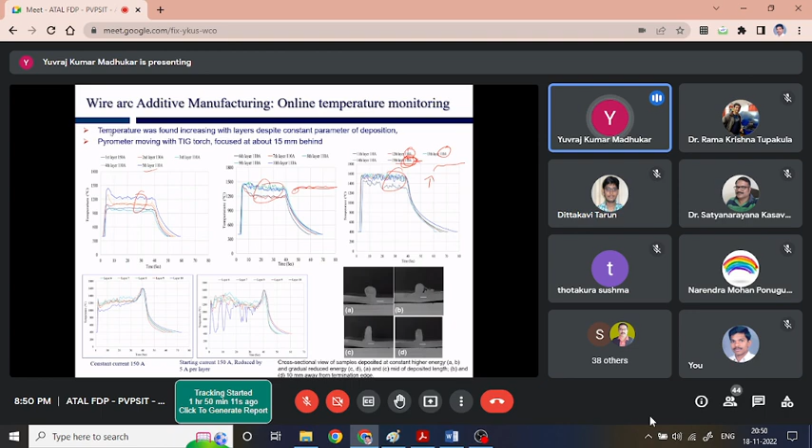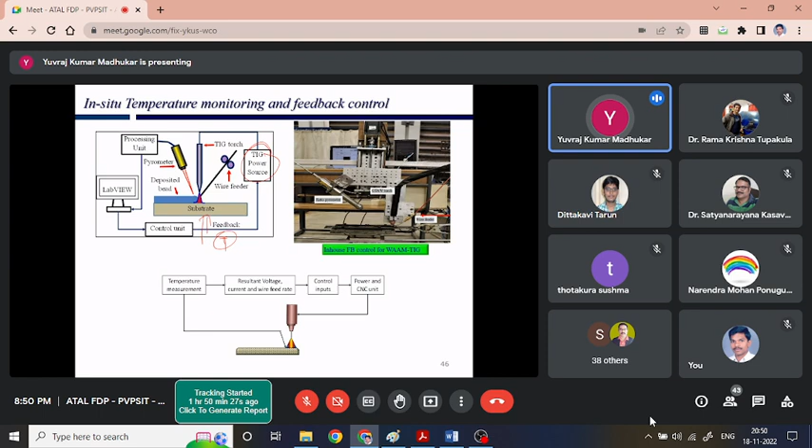We are controlling the temperature, meaning we are controlling the input energy of this TIG power source. Here, basically in this case, what we are doing is measuring the temperature, and we are controlling the input energy such that the desired set point temperature can be achieved, by regulating the input energy through the TIG power source.

We can control it both by raising it to a certain temperature and then reducing it, and from a certain temperature increasing it. When it is focused inline, once we could achieve it, in order to ensure these constants are going to work always, or to modify it further so that it can work in a dynamic environment, we can do off-axis deposition or off-axis measurement.

So here, in another case, this is the heating source, and we are measuring nearly 8 to 10 mm away from the peak heating temperature. Now, the temperature we are getting here is basically the conducted energy. But still, by carefully optimizing these parameters with a little modification from the first case, we could control the temperature.

Once we are able to reach this state and get some value of these PID constants, now it is time for going for the moving heat source without any deposition. Just move the heat source and try to optimize again if something is required to optimize this constant, and with a certain hit and trial method, little bit of up and down, we could able to achieve it.

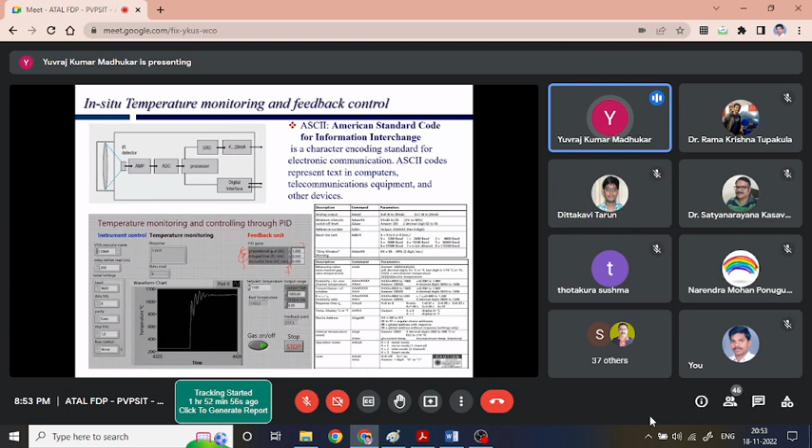Otherwise, in the actual environment, when we start depositing, the process is going to be very much dynamic. Plus we are measuring it at a certain distance behind, so there again a lot of effect of the dynamicness of the melt pool comes into the picture, as we saw in that thermal video. So the temperature is going to be very much dynamic, and we have to ensure our system works in all kinds of environments. Once we could ensure that part, we could deposit single bead, multi-bead, no problem.

Here we could see, within this, we are depositing low alloy steel. We could able to hold the temperature. We are measuring it nearly 10 mm behind the arc, and we could hold the temperature at 1200, 1300, or 1400 degrees centigrade, or even using the deposition of a bead itself, we could control the temperature from 1400 to 1200 or 1200 to 1400 centigrade—we can regulate it.

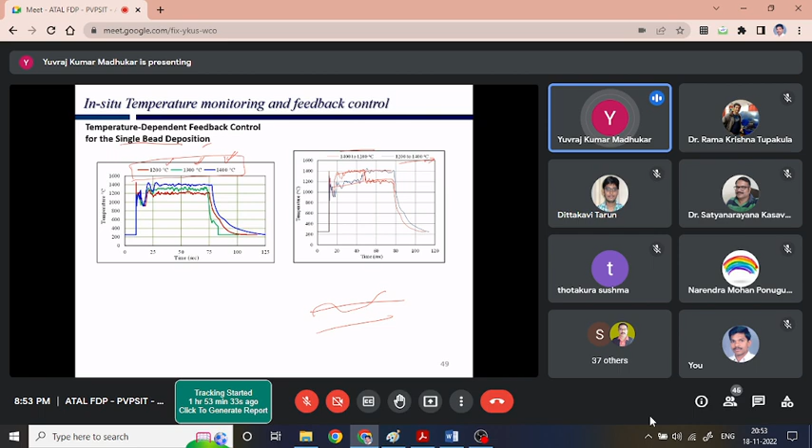Now the question comes: what advantage does this kind of control system give us? Here we could see, with respect to different set point temperatures, when working at 1200 degrees centigrade, the bead width is lesser and the bead height is more. At 1400 degrees centigrade, the bead width is more and the bead height is lesser, because we are giving more energy. That means the physical characteristics of the deposited bead change with respect to the set point temperature.

Now, when we try to see the mechanical properties, yes, they also change with respect to the set point temperature. At 1200 degrees centigrade, the hardness was high. At 1300 degrees centigrade, it was relatively low. At 1400 degrees centigrade, it was further low. That means by controlling the temperature, we can control the bead's physical properties—bead width, bead height, dimensional accuracy—while at the same time controlling its mechanical properties.

We can make this applicable not only for welds but also for cladding, alloying, and different kinds of weld joints, no problem at all. At this point of time, we could possibly control it for the desired shape as well as the desired mechanical properties.

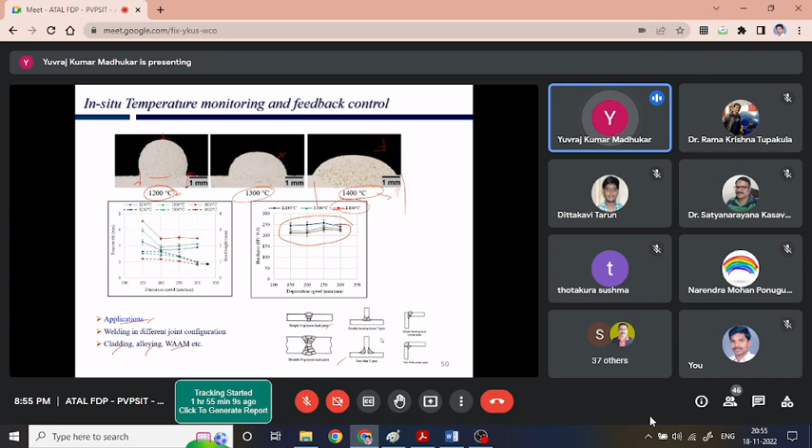Now, looking at some data on how much time it takes to stabilize and how much error we are getting: typically, the error in this developed system is of the order of 0.3 to 1.67%, which leads to only 5 to 25 degrees centigrade. In case of a dynamic heat source, it goes from 1 to 1.67%, which in terms of temperature is in the range of 15 to 25 degrees centigrade.

Now let us talk about the melting point of this steel—it is of the order of very close to 1450 degrees centigrade. Considering that, the error in this temperature range is very much lesser. So with this way, we could deposit any material. We need not optimize the parameters again, because for most materials we know the melting temperature. Let us suppose we optimize this proportional integral differential constant for mild steel—then we can work on stainless steel, we can work on titanium, we can work on inconel.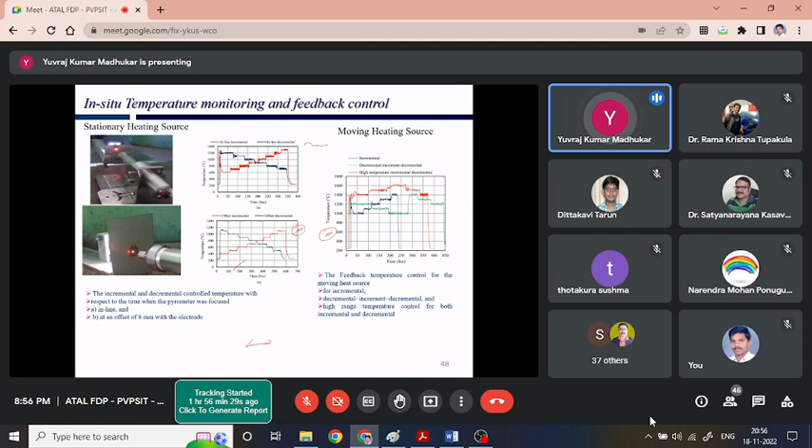By changing the material, it should not affect the process, because this is constant with respect to the process dynamics—it has been completely trained. So whenever you are working with different materials, we can set our desired set point temperature. We need not go for exhaustive or rigorous experiments in order to optimize the parameter and get the desired bead properties, bead mechanical properties, bead shape, or ultimately the desired shapes. That was the idea, and I think we are succeeding completely.

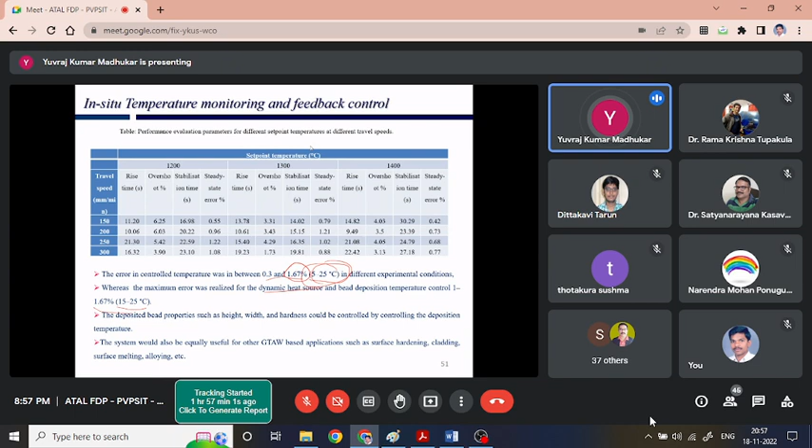But again, in case of WAAM, post-processing remains a matter of concern. Despite achieving good success with monitoring and control, since the bead melt pool size is bigger, the deposition accuracy is going to be relatively poor compared to any powder-based, laser-based process. So in order to minimize post-processing, we can come back to machining, depending on the application, for certain locations. The rest of the surface, where there is spatter or some oxidation, we can go for a conventional, well-traditional finishing method called barrel finishing.

In barrel finishing, we use abrasive particles, typically silicon carbide. We put the part inside and rotate or vibrate the barrel in order to statistically clean the surface and remove the oxide and spatters. This is a system we built in our laboratory. Here is the drum in which we feed the abrasive particles, and here we have some joints, then a three-phase motor with a variable frequency controller. Here we control its rotation, and here we have a suspension system, so that when it rotates it creates vibration, making the cleaning faster.

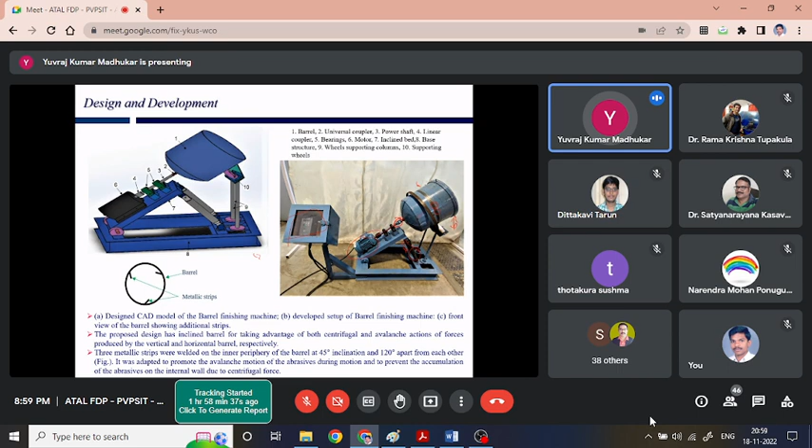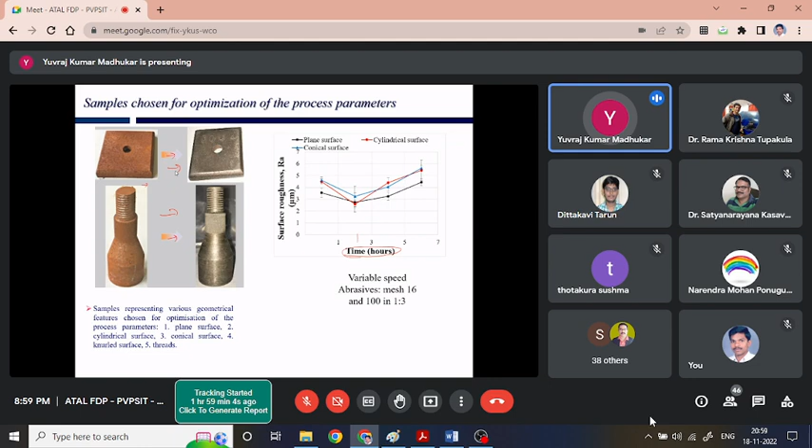In order to optimize how many hours or minutes we should clean it, we try to optimize the parameters along with a certain rotational speed. So we take a standard shape like this, and within a duration of 1.5 hours or so, we could see it completely cleaning the surface. So within that time duration of 1.5 hours, we were able to clean one part as well.

Here we see the as-deposited sample and the clean sample, as-deposited and clean, as-deposited and clean. Similarly here, all the oxide has been removed, and some amount of spatter has also been removed.

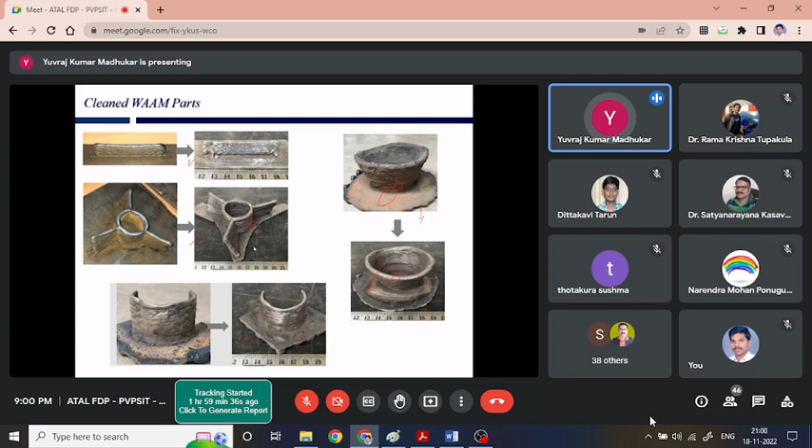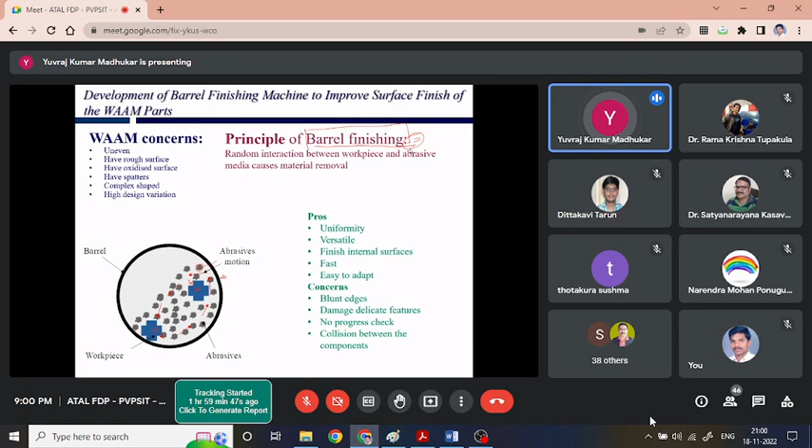Yes, this barrel finishing cannot completely replace the machining requirement. However, machining we can selectively do for the desired locations only. For the rest of the area, we can go for innovative ideas like this barrel finishing—a conventional method of cleaning the rest of the body, removing oxides and some spatter. So now, if we look back...

All these processes—whether powder bed fusion, blown powder method, or WAAM high deposition wire-fed method—have certain advantages and limitations. In some cases dimensional accuracy is good, in some cases cost is effective, in some cases deposition rate is good, in some cases intricate shapes can be made, in some cases support structures are not required, and in some cases making support structures is very difficult. However, as such, these processes are not in competition with each other. Depending on the application, we have to select the appropriate process.

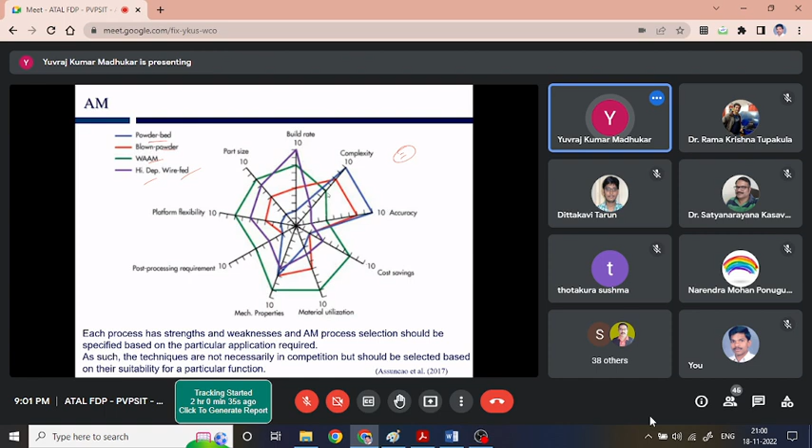For example, in this particular lecture we talked about WAAM. We started from the basics of WAAM and made our own CNC workstation. We learned which power sources we can use and what constraints we have to follow. Then we came across the limitation of support in WAAM, and we overcame that problem as well. After that we looked at control—how we can implement control, and which parameter we should try to control. If we select temperature as that parameter, it will be the best parameter to control. Then, which device should we use for measuring the temperature—like a thermocouple, pyrometer, or thermal camera.

Once we know that part, in case of a pyrometer, also what are the constraints it might have that we have to take care while buying the system, because these systems are very, very costly. The sensors are very, very costly. We have to make sure we are not making any mistake.

Once we are achieving that part as well, after that also, what are the other constraints we have to write our own code. It should be communicated with the ASCII commands. Then after certain rigorous experiments in order to train our system. Once we are able to achieve this, just control is possible, and we can monitor the process, no problem at all. So I think we are just ending up with that time.

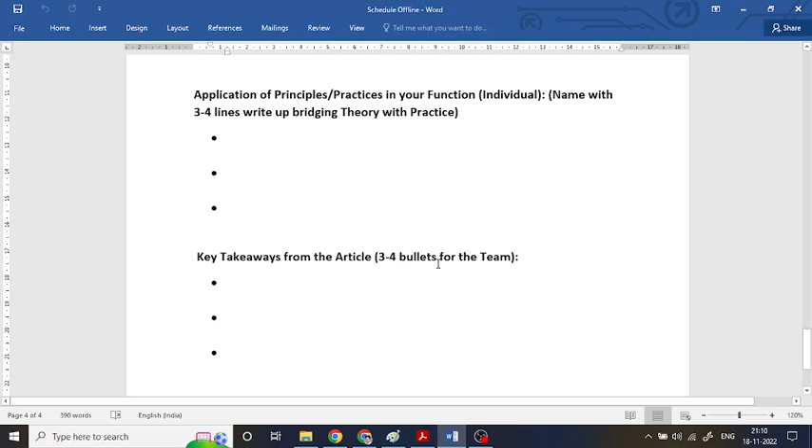So what we will do is, during the offline session, first day after the inaugural session, during this time we have given 1 hour for article 1 discussion. We will divide the total participants into some 7 or 8 teams. Each team has to discuss article 1 and submit a report in the format we have shown. Article 2 discussion is on Tuesday.

So by Tuesday, both the articles will be discussed. That's what I mentioned yesterday. I request all the participants please go through both articles so that this time can be utilized effectively.

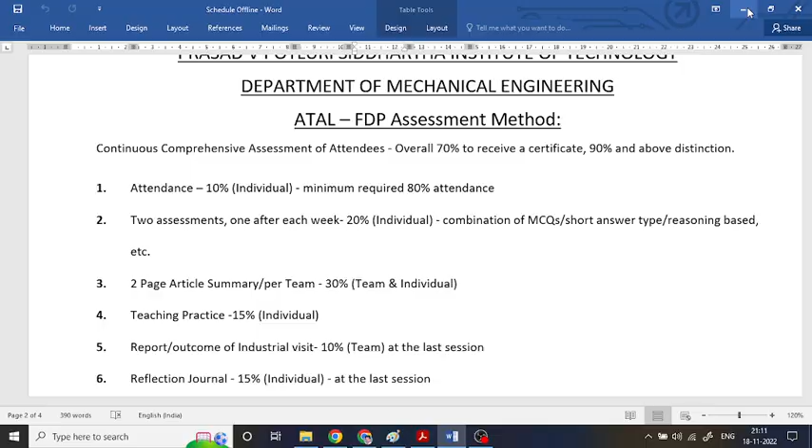Tomorrow, once again I am informing you, tomorrow after the end of the session we are conducting the first assessment test. If anybody is having any doubts regarding this, we can discuss now. If anybody requires accommodation, we are providing limited accommodation for limited participants. Please let us know by tomorrow. This is on a chargeable basis, of course.

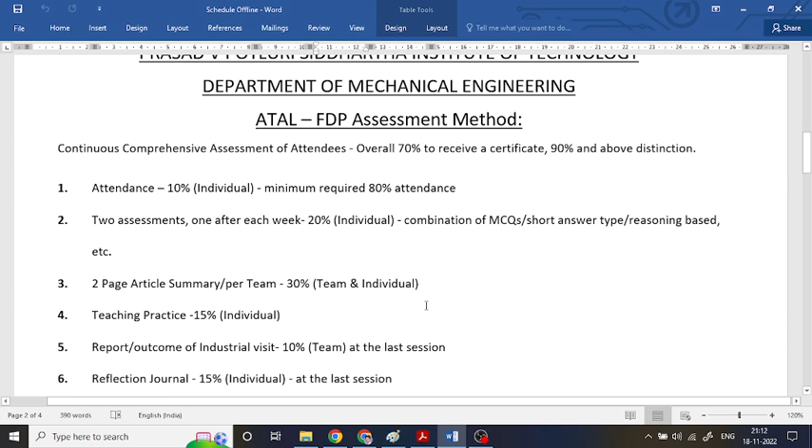Now this is once again showing you the assessment. If you get 70% out of all these 6 components, you will get a certificate. If it is 90% and above, you will get distinction. 10% will be given to attendance, for 2 assessments that is 20%, article summary 30%, teaching practice 15%.

Outcome of industry report, that is a report on industry visit, is 10%, and it is a team activity. The reflection journal is 15%.

Now you can see clearly, Atal instructions are given that the 5th and 6th must be conducted at the last session. So we are doing the same, strictly as per the directions from Atal.